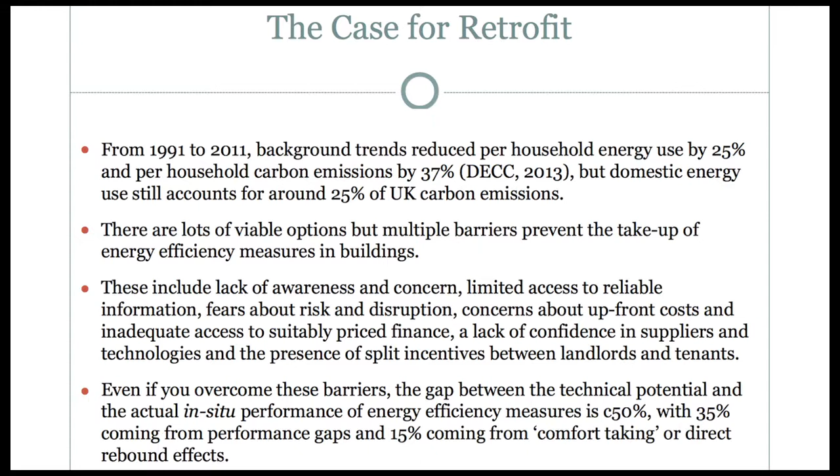When we look at what could be done, well, there's loads of stuff you could do, but multiple reasons why most people don't do it. I won't go through them all, but lack of awareness, lack of information, skepticism that it's really going to work, lack of access to money, lack of trust in suppliers—all these things conspire to mean most people don't exploit all of the available opportunity.

On top of that, what the research says—and this is based on real data—is that these measures lose about half of their potential gains because they're installed incorrectly or used incorrectly. So if you insulate a house, sometimes they don't put the insulation right up to the corner of the attic, and you lose energy that way, and so on.

Some of the potential gains are also lost because of comfort taking, or rebound effects, as we call them. Comfort taking is where you have a more energy efficient home and you consume more heating as a result. Instead of turning the thermostat down or keeping it the same, you take your jumper off and live in a warmer house.

If you're fuel poor, you're not adequately heating your house already, so that's a good thing—you are in less fuel poverty as a result. But there are big questions around whether people who are not fuel poor just consume more energy because it's cheaper per unit of heating, and I'll come back to that in a second.

There's a real question about whether this stuff actually works, and I'll give you an example now that will address that question. So Kirklees, Huddersfield—the Kirklees Warm Zone scheme is one of the biggest retrofit schemes completed in the UK to date. It cost £21 million.

Some of that was local authority finance, some was energy company money under something called the Energy Company Obligation—energy companies are obliged to spend money on addressing fuel poverty. It was initiated by the council. There's a political story behind it, but I won't go into that today. It was delivered by a company called Yorkshire Energy Services, a not-for-profit company that coordinated the scheme, but it was local builders and electricians and so on who actually did the work.

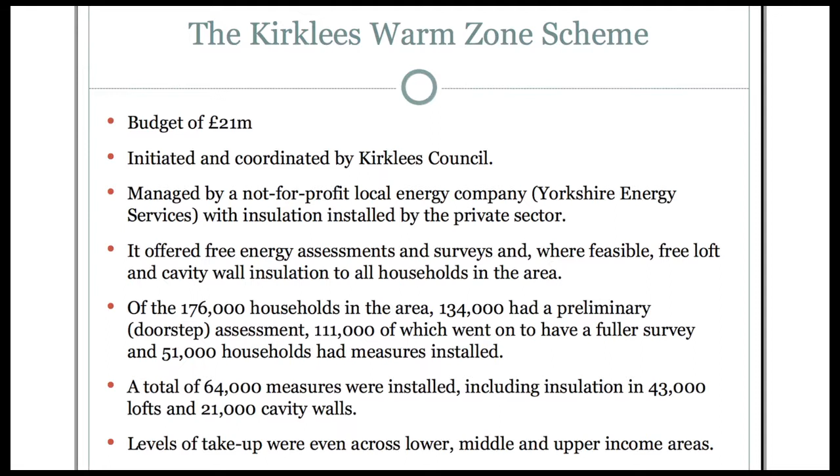So we have just completed an evaluation of the impacts of this scheme. And what we found was that the impacts were much greater than were predicted, and therefore the savings we predicted in the Sheffield City Region report are probably an underestimate if the same kind of outcomes could be achieved here.

Impacts were 20% lower in lower income areas. In other words, it was better at addressing fuel poverty, but it also led to financial savings for fuel poor households in lower income areas. So on an equality aspect, and also on a public health aspect, that is a very positive thing. I'll come back to public health in a second.

However, impacts were nearly double what was expected in middle income areas and more than double what was expected in higher income areas. The reason being that households in those areas were already adequately heated, and rather than turning the thermostat up and taking your jumper off because it was cheaper, the surveys back this up, those households kept the thermostat the same or even turned it down a little bit and banked all the savings as an energy and hence financial saving. So it was twice as effective as was predicted for middle and upper income areas.

And what that meant was that the average annual saving was around £125 a year, or around 10 or 11% of the household energy bill.

And when you aggregate that up for the whole scheme, the £21 million that was spent generates total savings of £6.2 million a year for the area and for the householders within it. The payback is therefore 3.5 years and it generated around 240 jobs. So all of that is higher than we predicted. It's a better outcome than the Mini-Stern suggested was realisable here.

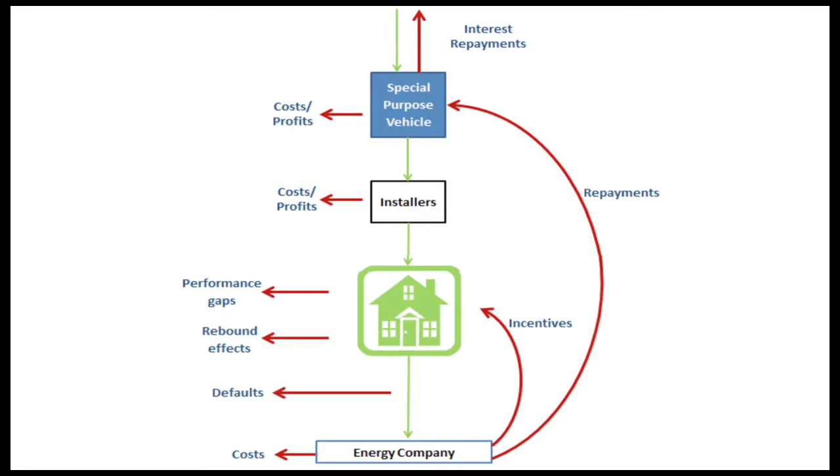And then the remainder goes back into the community interest company and is recycled and reinvested. The analysis shows even with really leaky systems, with loads of money leaking out, this would reduce the £800 million figure to £600 million. So you'd save £200 million by reinvesting the benefits. And then the whole thing becomes self-financing.

Anyone who's bought a community bond - the company would buy it back over time after paying 5% interest for as long as you own the bond. All investors would be paid, and the impact would be that all houses in the city region were retrofitted within 17 years, with the whole thing utterly self-financing over a 30-year period.

So some of this is optimistic, right? It requires some institutional investment and innovation to happen, but that's pretty much what Birmingham has done. It's pretty much what Leeds is doing. It's pretty much what Newcastle is doing. Reading, Brighton, Bristol, multiple other cities are doing something similar.

And there's a lot of grant income around to set up feasibility studies and run demonstration schemes, with funding into the tens of millions to enable Sheffield to set something like this up, adapt it a little and get it working. What it needs is a little time, a little leadership, and a little support. It can grow small, prove its feasibility, and then as it's proved to work, it can take off quite quickly.

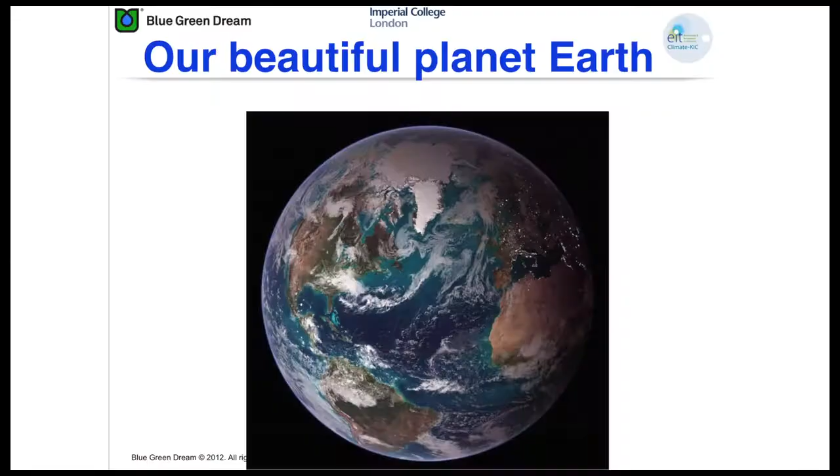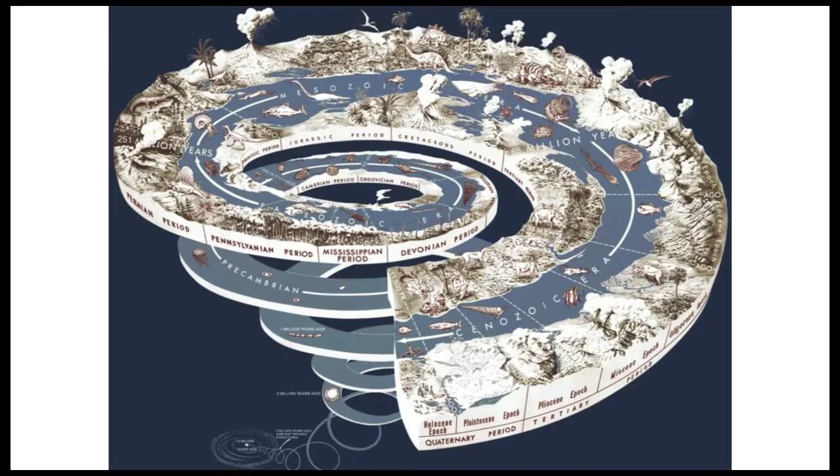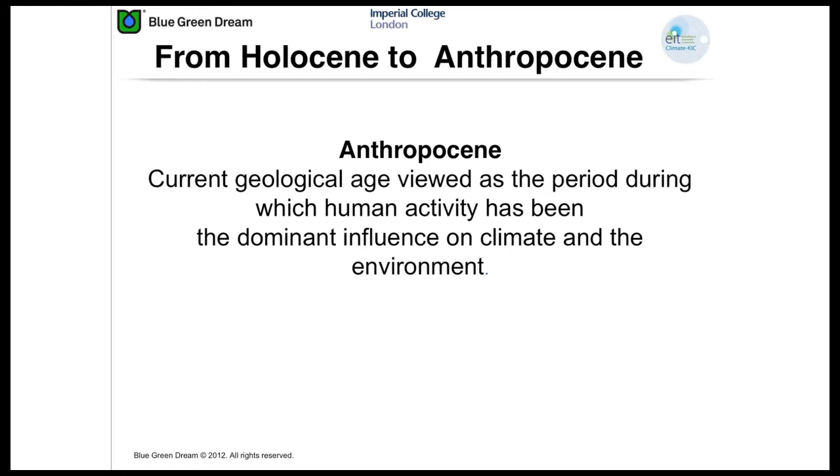See how beautiful it is. Unfortunately, it is under big problem. It took millions and billions of years to create this planet. The last 12,000 years, called the Holocene, when people started farming, domesticated animals and so on, is a geological period. In the last 200 years, it took us only 200 years to start having an enormously negative impact on climate and environment. People even call this new geological period the Anthropocene. The Anthropocene is so small you don't even see it, it's a very small slice. And we have been very efficient in ruining this beautiful planet. So we have to do something to reverse this trend.

I was in China last week, and they're taking it seriously. They are big polluters, but they're taking it seriously. So what can we do here? Can we make this planet, can we first of all save it?

We are facing a big problem and we have to do something quickly. What's been presented is a brilliant example of how you can do things at a small scale in one sector, and if everyone else does the same in all countries, in all sectors, we can save it. So we think we have a solution called Blue Green.

So why do we do that? Well, temperature is predicted to rise about 2 degrees by the end of the century on average globally. Anything beyond that, 3-4 degrees, creates an irreversible process. We cannot fix the problem. The planet is in big trouble.

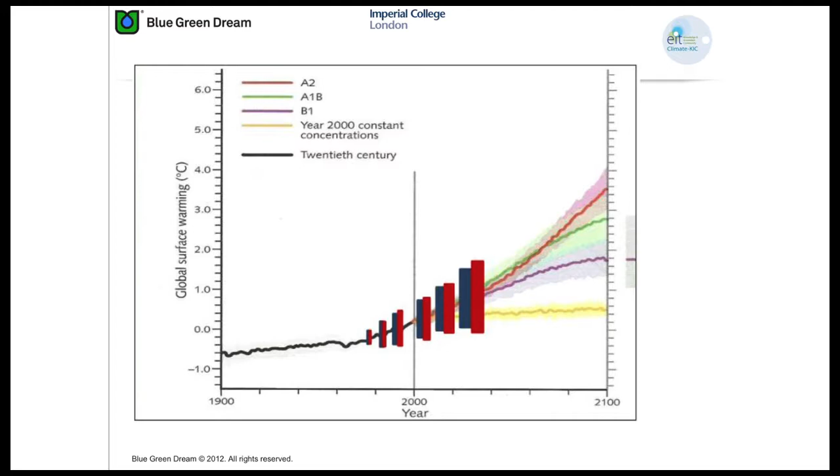We already have enormous problems with extreme weather. We may have the same average temperature, but it's concentrated into shorter periods with higher temperatures and lower temperatures. Paris was unlucky in 2003, when in 3 days the temperature rose dramatically. 47,000 people died. You'll look at the internet and they say 14,000, but that's only central Paris. Looking at the larger area, my colleagues from Paris University say 47,000 died in 3 days. If you speak to French people, they say, oh, we know, climate change, it's a heat island. Well, it's not a heat island, there are many other problems.

So we are here. We've seen New York facing heat waves and cold waves and so on. So we are somewhere here. At the moment, planet Earth is consuming 50% more resources than is sustainable. With all the trend growth, business as usual, as Andy said, China and India, if they continue growing as they are and don't change anything, and if sub-Saharan Africa's population increases by 2 billion, which is predicted, by 2050 we are going to consume 2 times more than the planet can afford. So we cannot do that.

We have to do something now, and our design is very similar to Andy's. We have to start changing our behavior in energy, but also in many other sectors, so that by 2050 we reach a balance between natural resources, affordability, and so on.

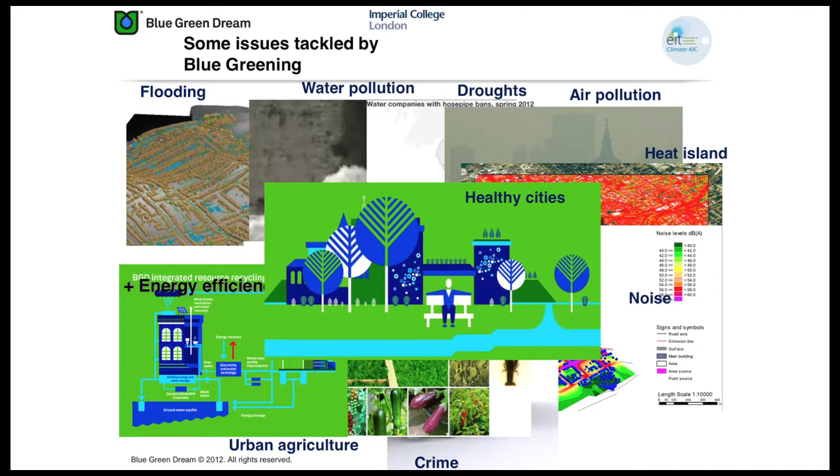In the end, we hope that our cities, by 30, 40 years, will look much better. Sheffield will probably look not only greener, but will have many other environmental benefits. London, at the moment, is losing every 10 years 2.5 Hyde Park equivalent of green space, and that is official data from the London Eco Centre. I don't know what the situation in Sheffield is, probably not that drastic, but it is happening all over.

If you applied the same criteria of stratigraphy and other changes of Earth processes, would you say we're in a new era? And the answer is yes. That's not a happy moment, by the way. This is not 'yay, humanity.' This is 'oh my God, what are we doing?'

Jeffrey Sachs had a presentation, 1 hour, in LSE. I suggest you download it, it's on the internet, and listen to him. It's a serious warning, and I've just taken 1 minute. It's not 'oh my God, what are we doing?' We have to do something serious.

Jeffrey is an author, one of the key authors of the Sustainable Development Goals, the key document of the United Nations, which has 17 points. I have just listed a few of them, most of them dealing with water. I'm a water engineer, a civil engineer, but I've now learned a lesson that we have to do much more beyond our own narrow areas of expertise.

Well, the clock is ticking, bells are ringing. We have to do something serious, we have to do it now. Well, the future is not what it used to be. How are the other people doing?

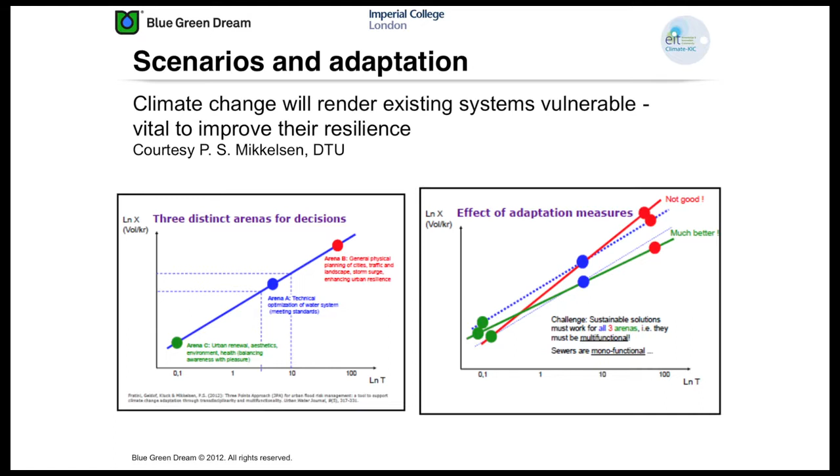Nobody has the money to invest in what we call a rich man's solution - let's build bigger dams, bigger dikes. Dutch people are now increasing their dikes from a 1,000-year to a 10,000-year time period. Well, it's very expensive, and the solution is only this limited amount of money.

When we invest in something, we try to look at the multi-benefits. We try to see if we are investing in water or energy, can we, with the same pot of money, get some other benefits? The answer is yes, and this is the only solution: multifunctionality, multidisciplinarity. I'm going to show you how we do that.

We cannot go for the poor man's solution, where poor men invest in something and it then fails. We have to look at the wise man's solution. We thought that we had a city with water, sewer, and drainage, and we were well off. No, unfortunately, we have all these functions, and they dysfunction. So the Australians have come up with water-sensitive city design, and we are embracing it.

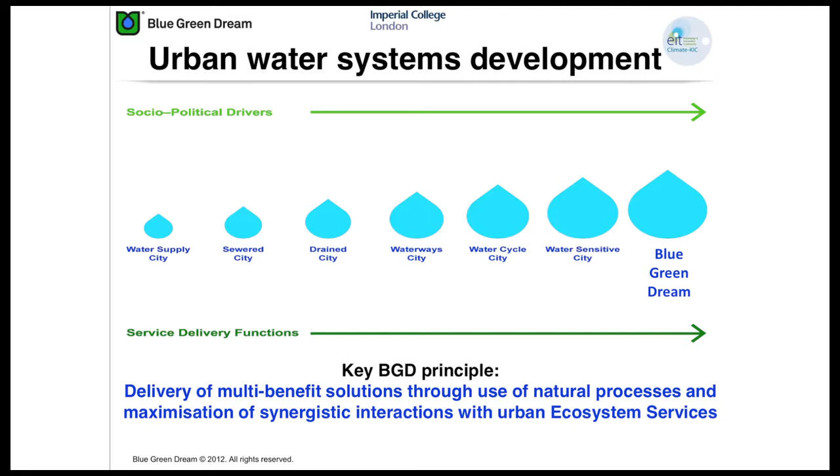And Blue Green is not only about water; it's about energy, biodiversity, and other sectors. So we start with water as a blue element: urban water, water supply, drainage, treatment of wastewater, and interactions with green spaces. In the past, we had architects, landscape architects, energy people, transportation people, all working in silos, not even talking to each other often, even within the same consulting company.

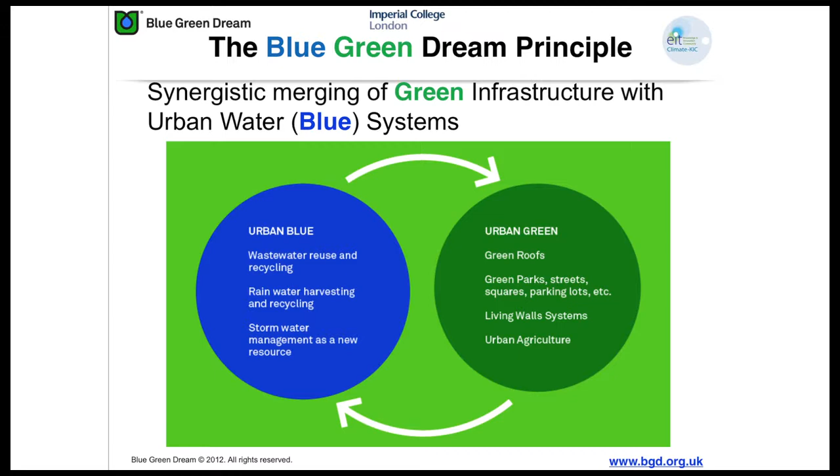Unfortunately, this doesn't work anymore. We have to learn how to talk to each other before starting a big project, whether retrofitting, reconstruction, or new design. We have to bring on board all other experts: energy, biodiversity, carbon capturing, transportation, air pollution, noise. This project is about creating tools and methodology and demonstrating that this method works, and it's the only sensible and financially affordable way our cities can go through all these retrofittings or new developments.

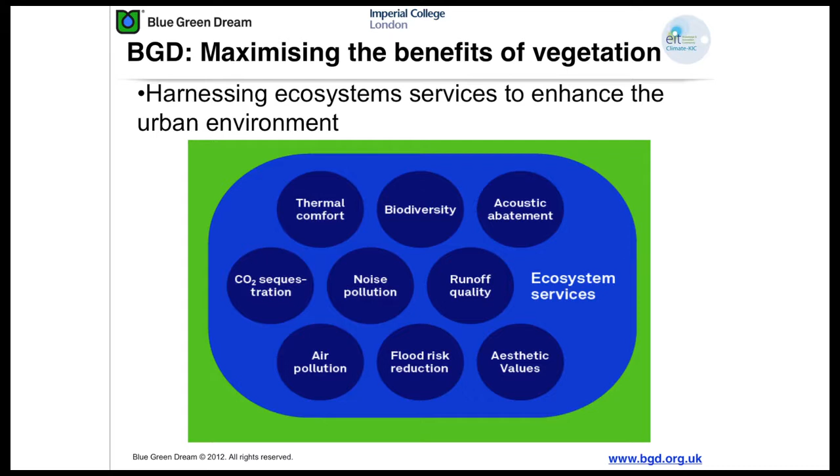There are quite a few projects in London worth a few billion. Elephant and Castle, 5 or 6 billion. Earl's Court, Old Oak, and so on—they are all multi-billion developments. If they are done differently than in the past, it's a huge saving. If done business as usual, they just create new energy demand.

So these are the 4 countries we have in this project: France, Germany, Netherlands, and the UK. I'm coordinating this project, and we have achieved quite a lot so far. We are now creating European regional centers for implementation of this philosophy in cities, in consulting companies, and at the individual household development level, and we are spreading this philosophy all over the world.

I was in China last week, and they are taking it very seriously. They want to create a Blue-Green Center China, with a blue-green center in each of the 40 provinces. In 2 weeks, I'm going to Vancouver, Canada, considered the greenest city in Canada, and I believe they can do much more with this more integrated, robust philosophy.

Well, where is the trick? It's nothing revolutionary, not rocket science. We have our house, and Andy has presented nicely how we can do a lot of things simply in the energy sector. We can do a lot in water, food, and other ways. We take a lot of potable water and use 40% of it just flushing the toilet.

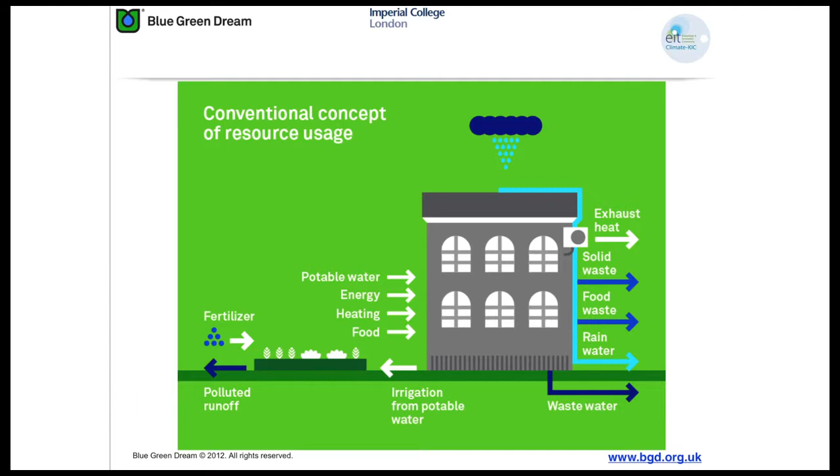We can capture solar energy with photovoltaics and store this energy—the next speaker will talk about storage—capturing it in summer and storing it in rock, as we've seen in a project, then recovering this energy back for heating. That means heating and cooling can be provided at 20% of the cost we now pay for electricity, using alternative, locally available sources.

Recycled grey water, recycled rainwater, and food produced in the house make our houses completely different. As Andy predicted, in 15 or 20 years, every house will do something with insulation. Other measures, including water, waste, and all the things that are part of sustainability, will also have to follow, using a similar model.

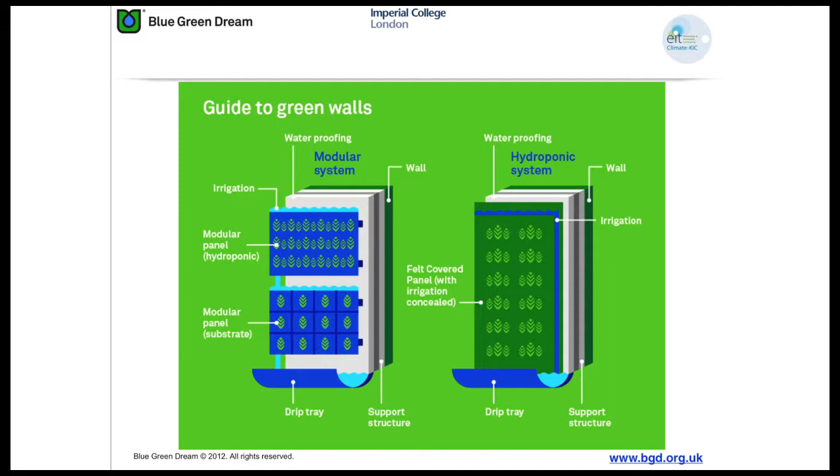Green facades—in the past people used them just to look nice. Now they can be used for treating water, biodiversity, thermal insulation, food production, and more. Multifunctionality is the key issue. We collect rainwater and wastewater and mix it, which makes it much more difficult to treat.

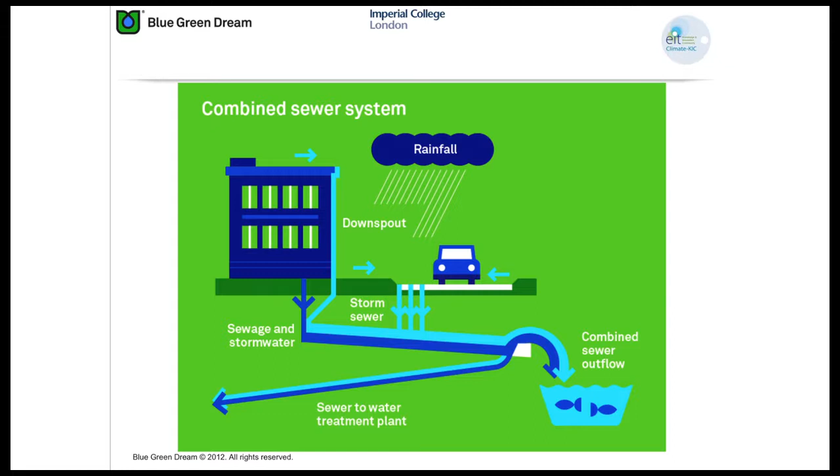If you keep them separate where it should not be separated, we are creating new resources. Wastewater is a resource. California faces a huge water shortage problem. My colleagues from Stanford University got a 100 million grant to come up with a new strategy. There's no other solution. Simple.

A city is a catchment area. Every drop of water is a resource. Capture it, recycle it, wastewater - that is the only answer for this huge problem in California. And if you do that with energy - Andy has presented a lot, but I'm expanding this bit - we can capture and store it underground.

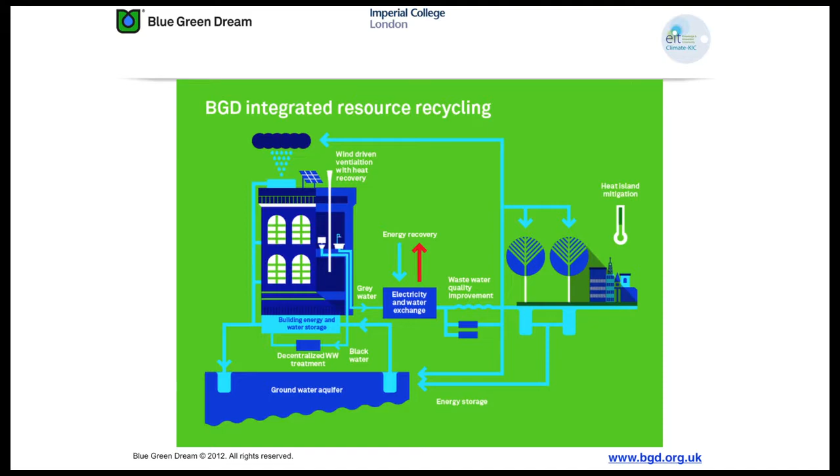We can recover energy from the sewers. In Berlin, we are now using sewer water to heat the whole library, and then dump the hot air in summer again into the sewer. So the humble sewer is just a heat source and a sink for waste. If you do that for heating, cooling and flooding, every little bit of urban activity has huge potential by implementing this.

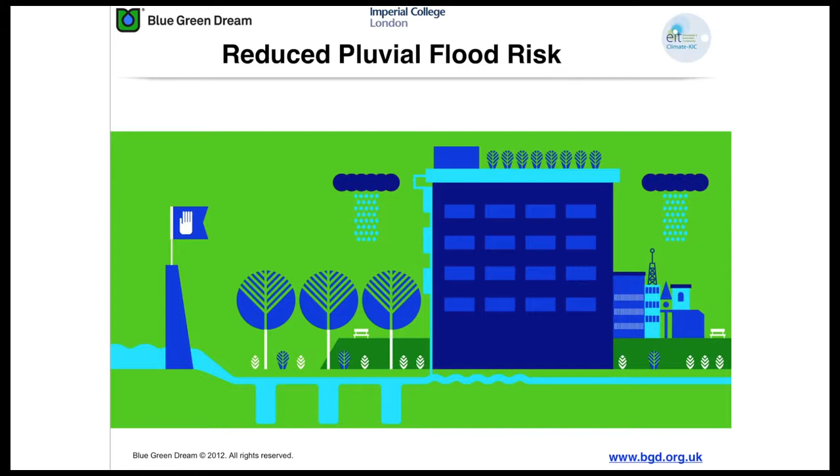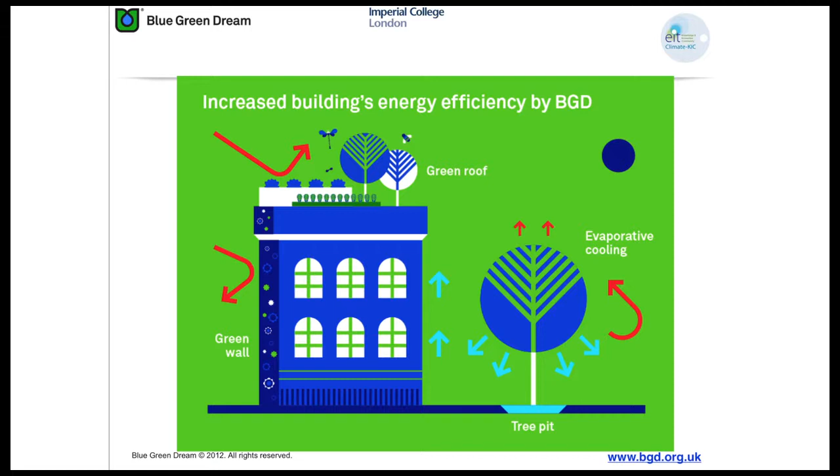Now, the humble tree - how many trees is Sheffield planning to plant? You hear these figures of millions and so on. Well, every tree which is planted should be done differently. If a tree is planted in a small pit, a small reservoir, it captures rainwater, reduces flood, reduces pollution, and it has this water for evaporative cooling when in summer hot air goes up.

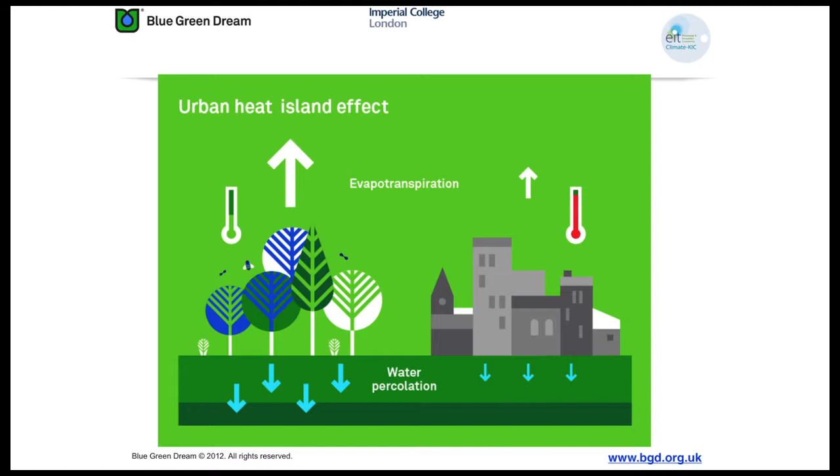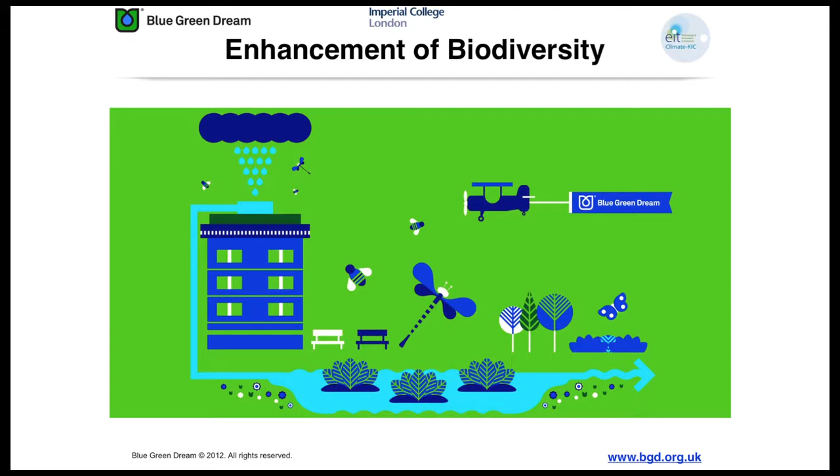Cold air is a new resource. We can use it in design and manage and design new cooling systems with this humble tree. But it has to be done differently, and that is already taking place - evaporative cooling, greening, biodiversity. Again, we need water. Trees are dying in cities. We need bees and insects for pollination, and they need water for support. And this water is not an unlimited resource - we have to recycle what we have.

Food production is already mentioned. We're working with the university in Zurich. They already have experimental fish farms on the rooftops of their houses, which farm fish, and it costs 20% of what you would pay for the fish in the supermarket, and you have it alive in your house. So it is not nothing - it is already a commercial product. They sell these fish farms on the roof, and people from Saudi Arabia already buy them massively.

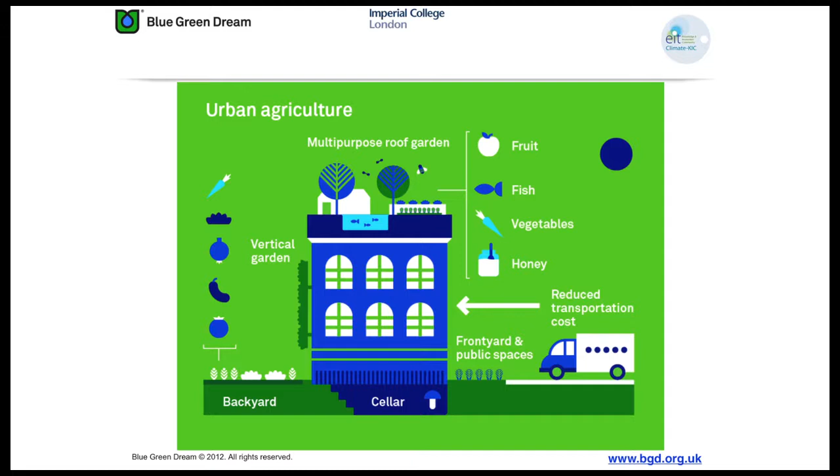Food production on the facade, on the roof, in the cellar and so on is again something. If you go to Detroit - it has collapsed economically because of the car industry. People were poor, so they started city farming. Detroit is now a big city farm. It is possible. It is not nothing.

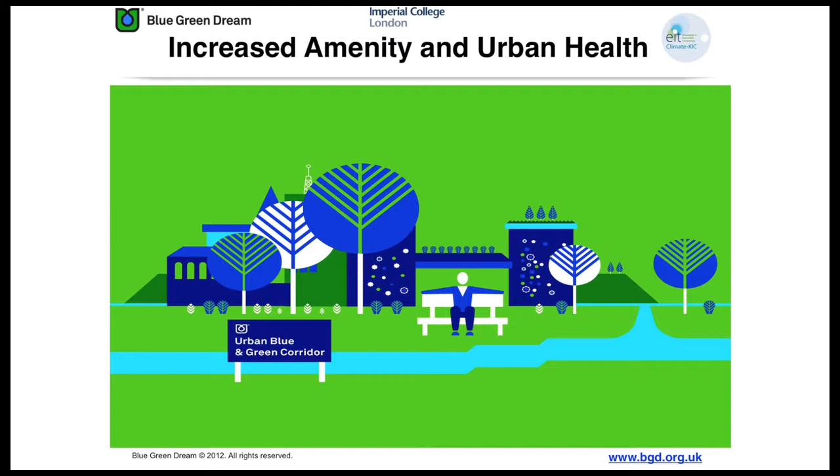And then in the end, we hope we will have our city. So I presented the philosophy of how all these bits or pieces, which are simple - water, energy, air pollution, noise, biodiversity - each of them has an element to improve sustainability. I'll give you a few examples.

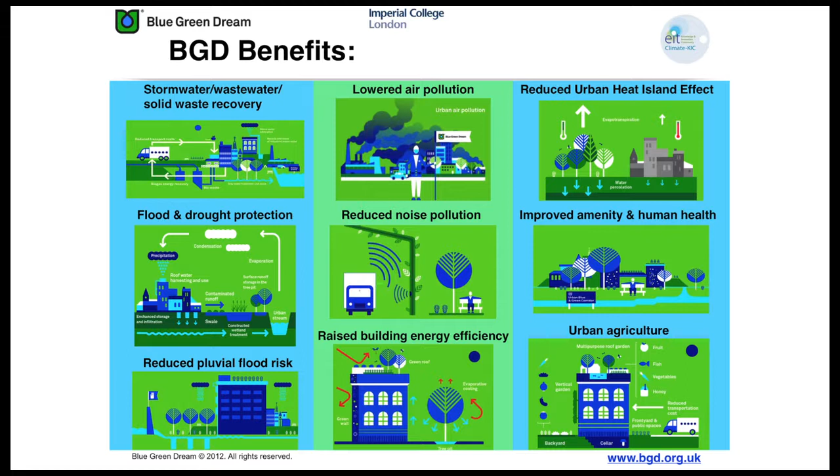All these topics need some research, some innovative models, some design tools, guidelines and so on. We have about 17 doctoral students in our 4 universities in France, Germany, UK and Netherlands, and we are developing new tools, but we are not waiting for these PhD students to create their Bill Gates companies and start making big money out of this.

We do it today. We can offer the city council in Sheffield an integrated city development based on the Blue Green Dream philosophy, bringing all these icons together, but paying very big importance to the group of people like your commission. I'm very much positively impressed by what you have in mind, and I would strongly support you, and I would very much be happy to come and do something with you. But this is the way to go - these things don't happen by themselves.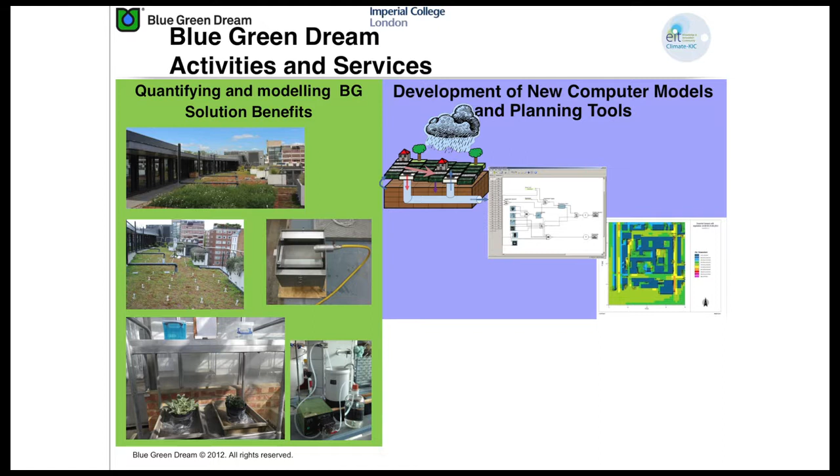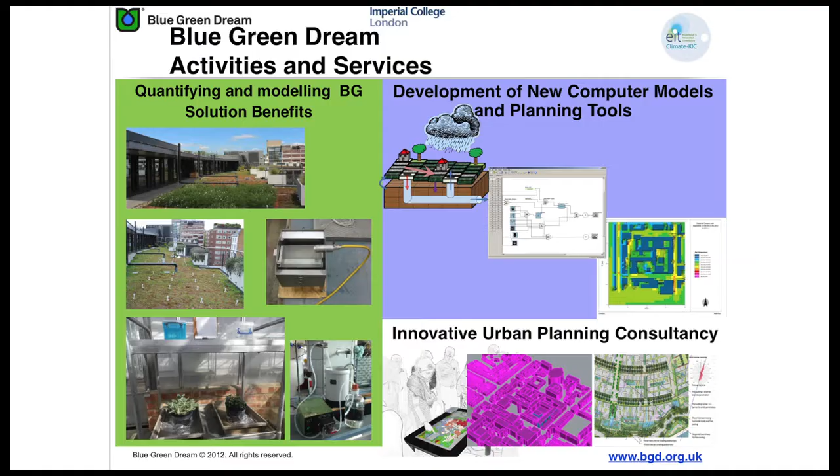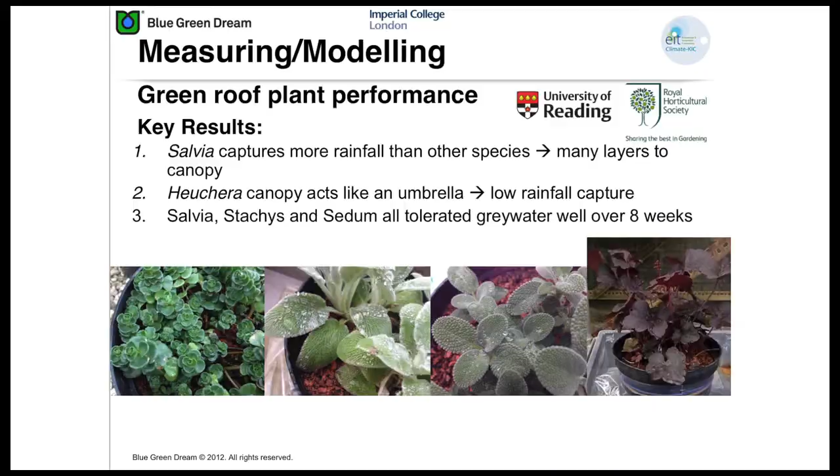There are a few examples already of how we work with green roofs and facades, experimenting with different types of plants and different methods of analysis and planning tools. So the key here is planning new development and retrofitting - from a single bedroom house, to a group of houses, district, development, city, whole country, planet. We need different types of plants - some are better for absorbing heat, some are better for reducing noise, and so on.

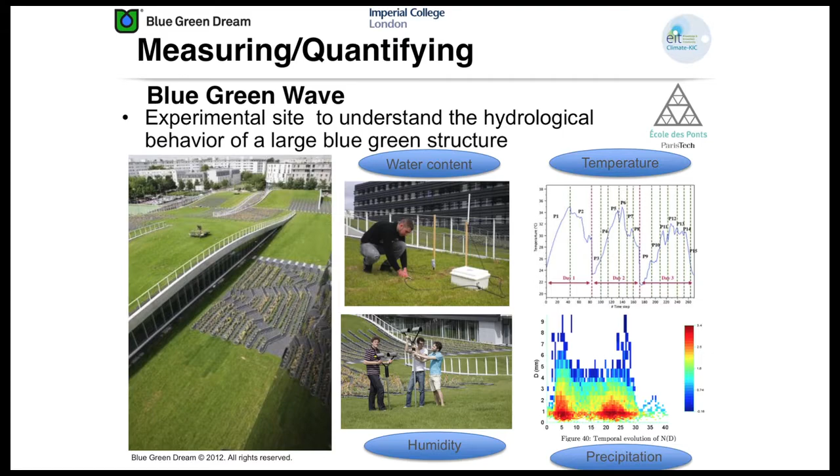And I'm going to skip some of the slides. This is the biggest blue-green experimental facility at the University of Paris, and we are working together with them developing new methodologies for predicting floods, for reducing heat island impacts, for improving irrigation with recycled water, and so on.

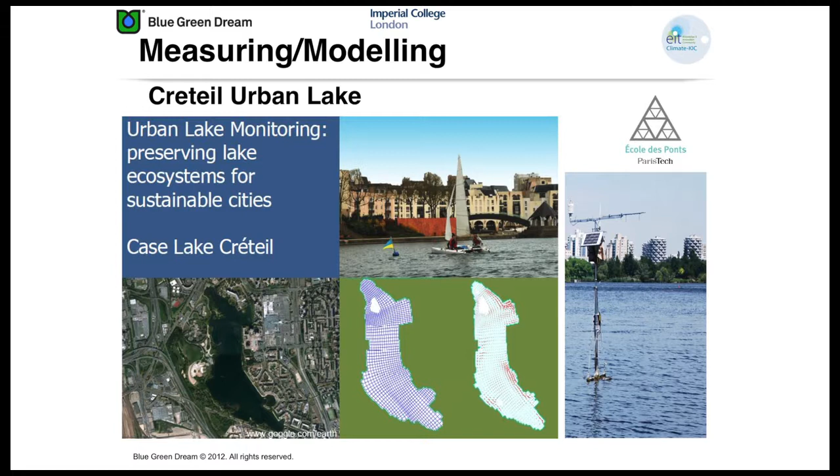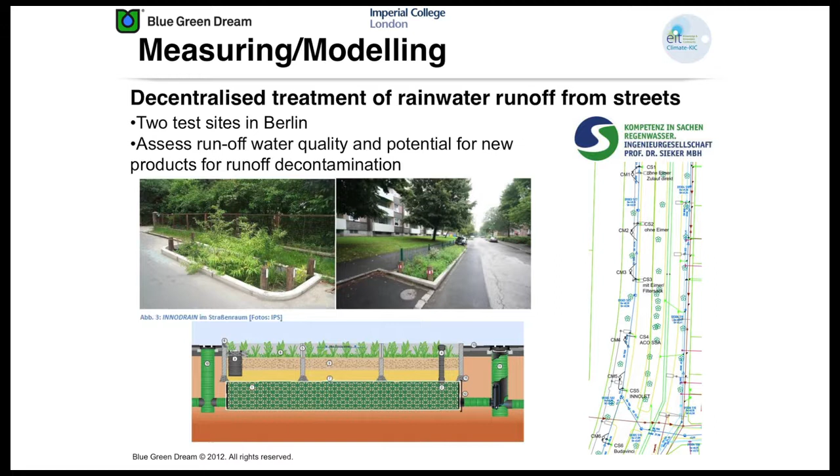We also have to tackle problems of urban lakes and energy. Every water body can be used for extracting and storing energy, and you can replace some energy use by using these natural systems. This humble green area in the street isn't just green space—it's a factory, a filter which improves water quality, reduces flooding, and reduces the heat island effect.

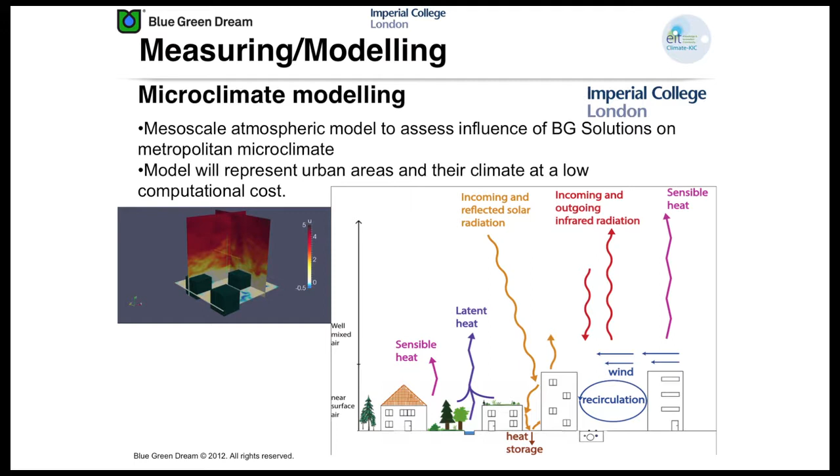Integrating the whole city, we can have much lower impact from the urban heat island. We're developing models of how green spaces reduce the negative impact of urban heat islands, and coming up with innovative solutions for planning, retrofitting, and designing new cities.

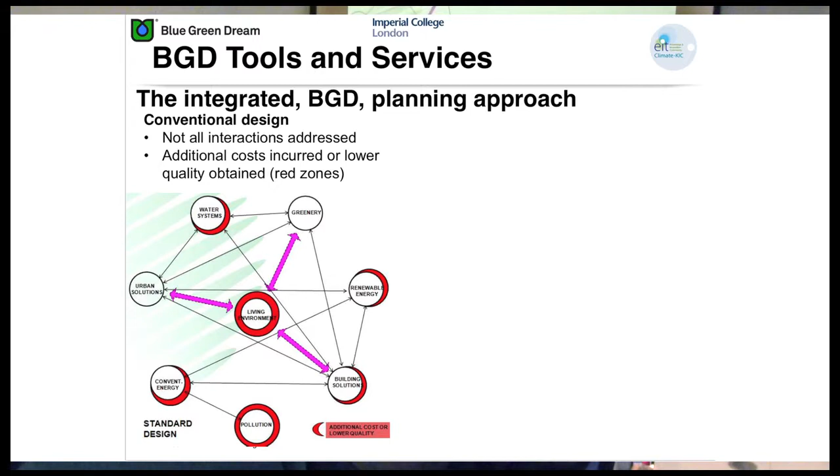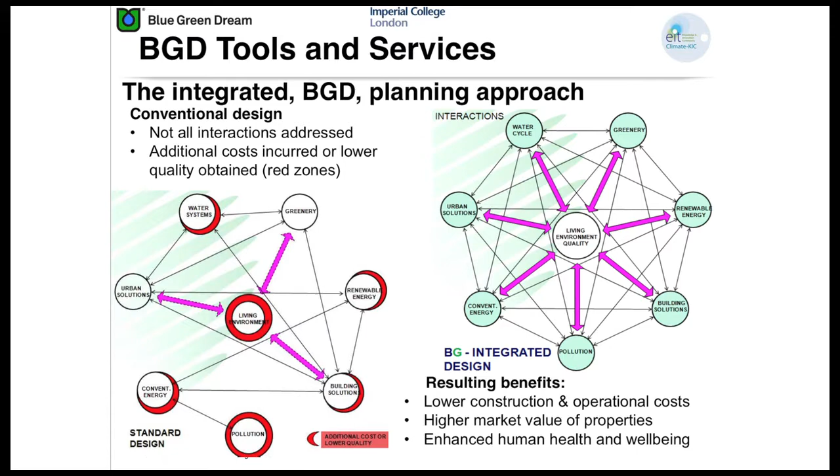This is a key diagram showing how designers and planners work at the moment: energy people, water people, biodiversity people—everybody runs their own show. They're not talking to each other, even within the same company. We have to come to a different way of communicating among specialists, and this is how we do it—bringing together architects, landscape architects, energy people, transportation, economists, lawyers, all together.

We agree on the multifunctional, multidisciplinary concept, and then we implement it. Our solutions have to deliver much lower energy consumption, much lower bills for water, energy, heating and cooling, a much healthier environment, much lower NHS bills, and a more pleasant environment with better property values.

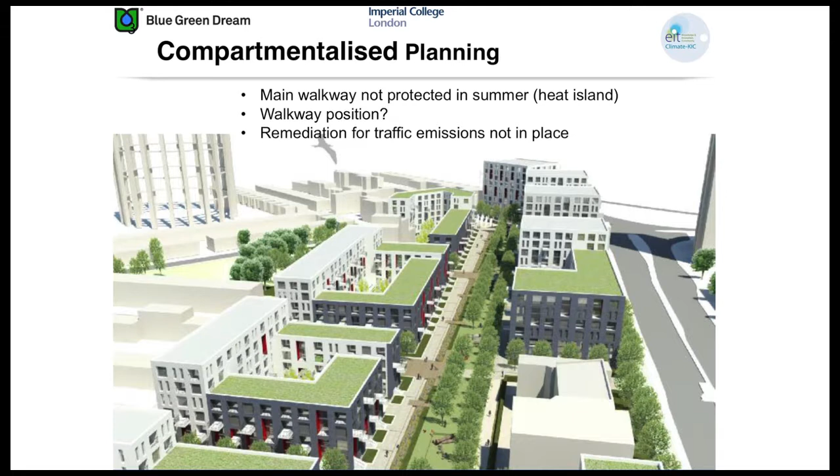This is an example of how things should not be done. This is a new area in London, designed, and after just two days of looking we found that 40% of energy could be saved if it had been designed differently, with no extra investment. These facades face south, warm in summer, and trees are on the other side of the street. If they'd been planted here, these trees would create a natural walkway, and so on—instead the water is just collected and thrown away to meet flood criteria.

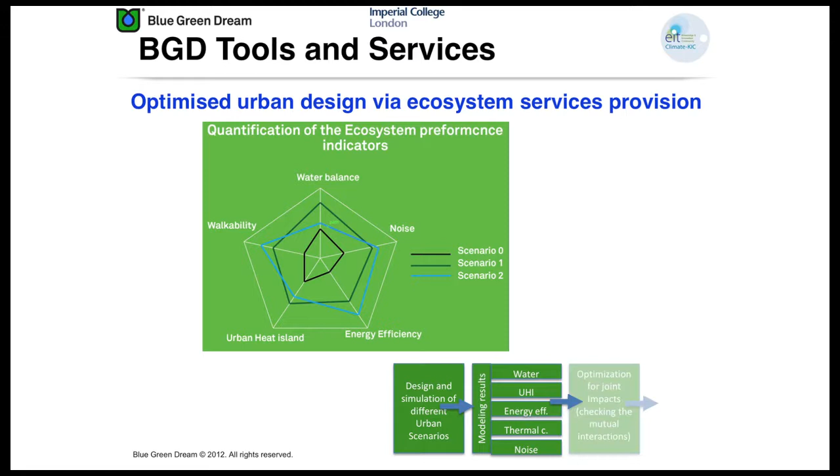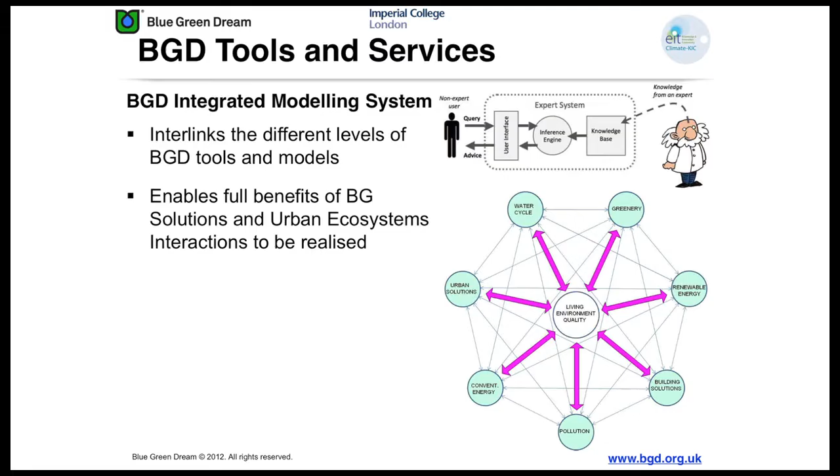The key issue is optimizing these functions in a city and coming up with new solutions. I'm going to skip some slides because there's a lot of technology here, and I'm over time. Essentially, the key when dealing with new developments is multifunctionality. I'll give you an example.

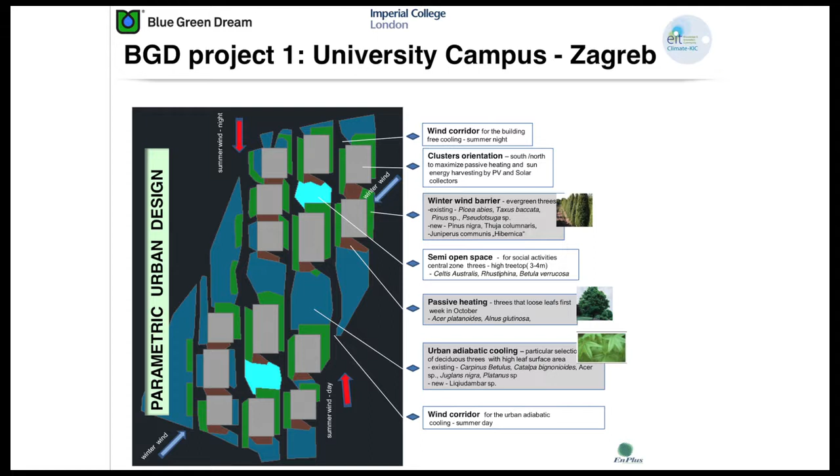A new university campus we designed in Croatia uses vegetation only and energy storage from the roof—64% less energy consumed for heating and cooling using natural processes.

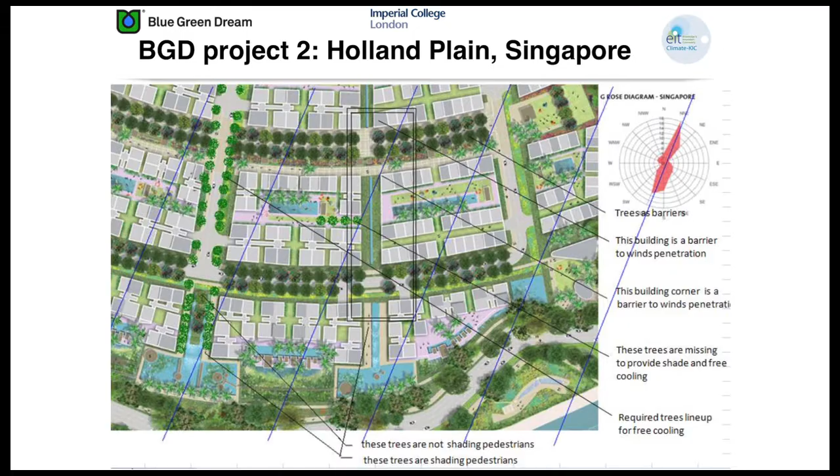And the first blue-green city we designed is being built in Singapore. This system has no storm drainage—all the rainwater is captured, recycled, and used for recreation and other purposes. I'm going to stop here.

I would like the university campus at Imperial to become a blue-green hub. It's a big bureaucracy—it took us two years to build just one green roof. Sheffield University has a green roof center, which is excellent. Thank you very much for your kind attention.

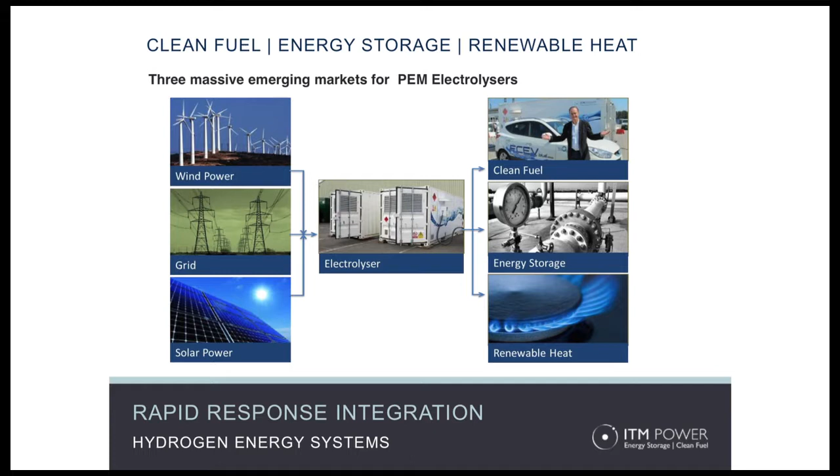That's becoming a big issue. It's called curtailment, and wind curtailment is costing the electricity consumer a lot of money, because we pay for that wind to turn off at night. It's not exactly a great selling point for renewables, and it's doing a lot of damage.

So our concept is, instead of turning off that wind, you turn on an electrolyzer and harness that surplus electricity and make fuel.

The problems with renewable energy deployment are experienced when you exceed that 20% capacity, or 8% by energy, in a country. Germany, Denmark and Spain have experienced that and are suffering real problems in what to do with all this surplus energy. There's only so much you can export, and it's often exported at negative cost.

So the economics of being able to store your electricity and make a fuel are improving.

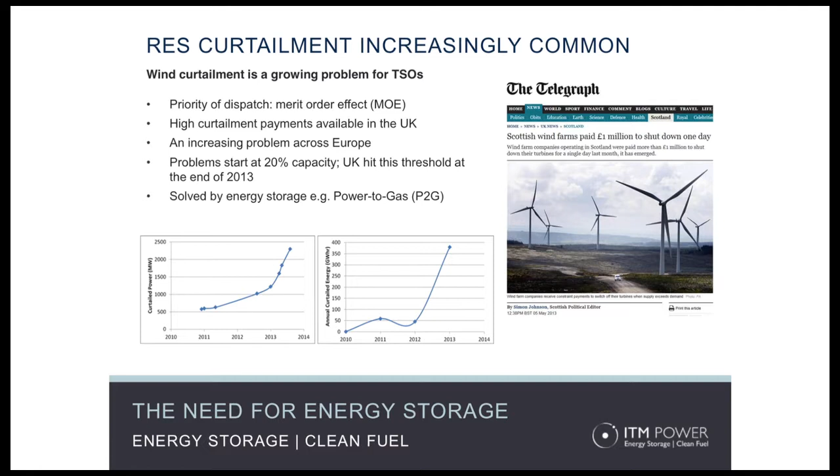Because the issue, and the reason why we turn off the wind, is because it's difficult to turn off your traditional power plants due to the time it takes to regenerate that electricity. And you don't know how long the wind's going to blow for because it's unscheduled. So at the risk of turning something off, you could lose power and have a blackout. So the costs for balancing services are forecast to be enormous moving forwards.

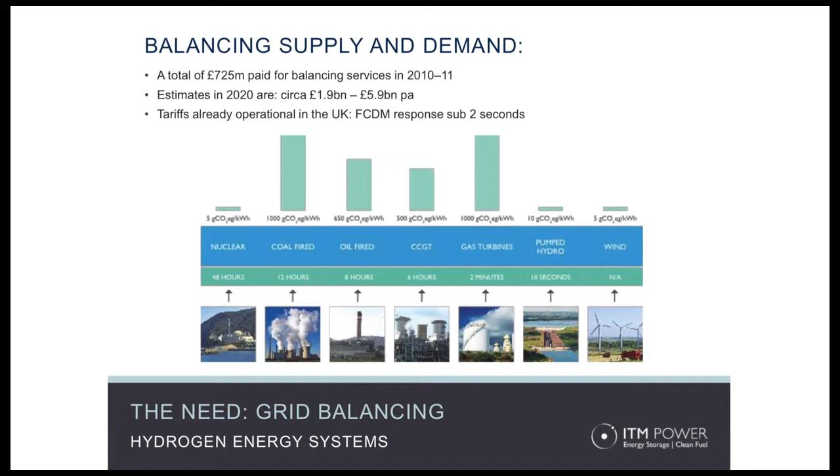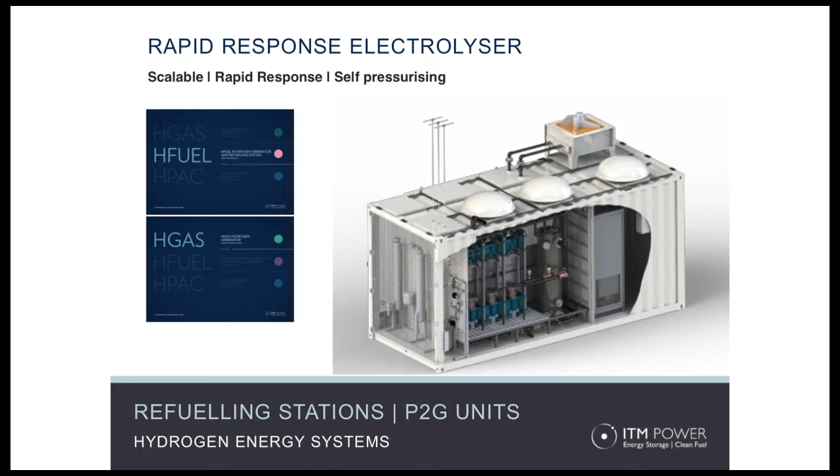And this is the system we turn on. It's a containerized solution, and it can be used either for fuel for cars or for long-term energy storage, where we're converting electrical energy into chemical energy and injecting it into the gas grid. It's called power to gas.

Power to gas offers a big opportunity to connect the electricity grid with the gas grid, with the electrolyzer acting as a direct transducer. So it's enabling you to inject hydrogen, the energy vector, and mix it with natural gas and distribute it in the gas grid - because the gas grid is four times the size of the electricity grid in terms of energy. You could also mix the hydrogen with waste carbon dioxide and make methane, synthetic methane.

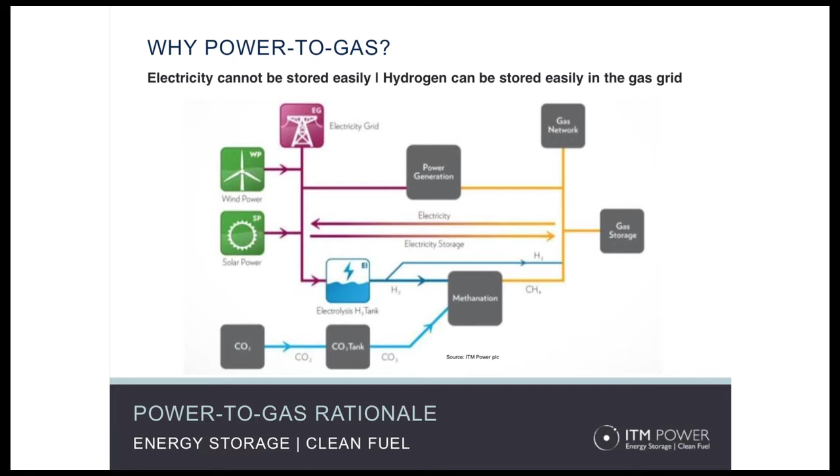The technology's there. There are a lot of energy storage technologies, and they differ between storage capacity and discharge time. On the left you have small amounts of energy, small amounts of time - batteries are ideal for starting a car. But with batteries you don't separate power and energy, so the physical size of your battery is linked to the time at which you can store that energy for, or use it for. With pumped storage, compressed air, and hydrogen, you're separating power from energy, which gives you a lot more flexibility.

But the issue with both compressed air storage and pumped storage is you've got to wait for that store to discharge before you recharge it. And if you're actually trying to harness renewable energy whenever it's generated, when it's surplus to demand, you can't afford to always discharge before you recharge. It's not practical, it's not possible.

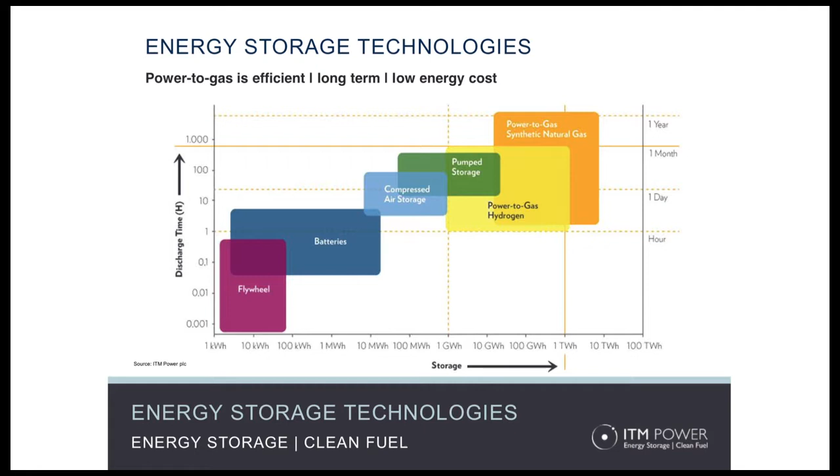So power to gas and hydrogen is the technology we have, and the electrolyzer is just the converter. We're using storage infrastructure that we already own, we've already invested in, and we don't have to wait for it to discharge before we recharge it.

So it's all very well talking about theoretically wonderful ideas, but where's it demonstrated? Well, our plant is the first system anywhere in the world to be demonstrated injecting hydrogen into the gas distribution network. This was a sale to the Thüga Group, a group of about 100 German utility companies, an enormous conglomeration, vertically integrated, dealing with gas, electricity, transport, and telecoms. The Thüga Group bought our system to undertake a pilot project to demonstrate the concepts, test the technology, its robustness, its efficiency, and the practicalities of harnessing and converting wind electricity into hydrogen and injecting it into the gas grid. So there in front of you is the system.

The container, you just plug it into a water supply and electricity supply, put on hard standing. And next to it is a gas mixing plant. So the hydrogen that's made by the electrolyzer then goes into another box and is mixed with natural gas and injected into the gas grid.

From a perspective of the first of its type, Thüga have invested in a visitor centre which attracts politicians and utility companies globally. It's a real lighthouse project, going on for the last 18 months now, and Thüga are getting more and more excited by it. They've started to issue press releases on its performance and its technical capability to enter the secondary power market, which means it can balance the grid. And that increases the economic viability because there's another cash flow.

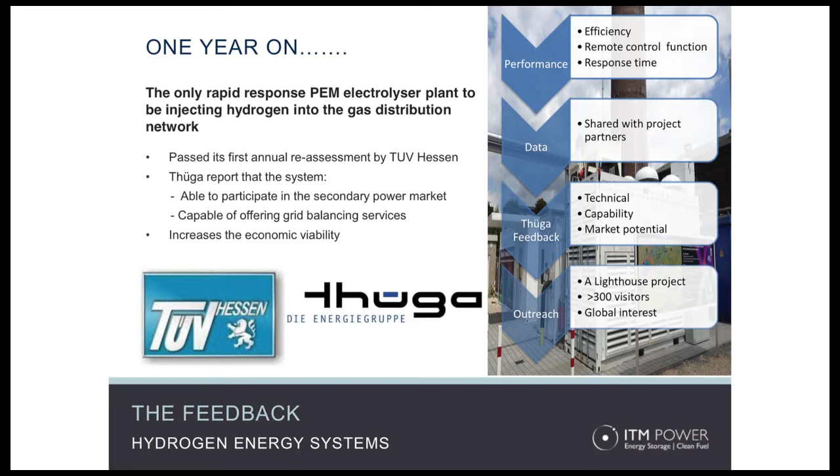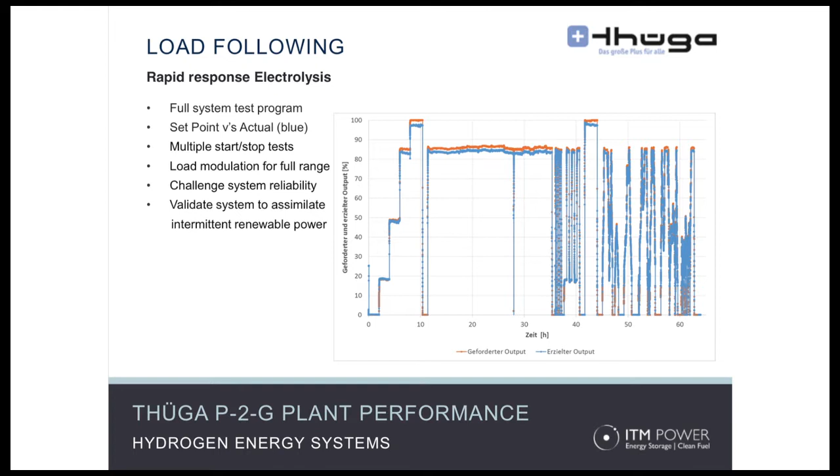This is an idea of some of the electrical input. The orange line is the input from a power station that's essentially been trying to push it to its limit in terms of the poor types of energy it can throw at the system. The blue line represents the response. On the right you have a wind profile, a typical wind turbine, and it shows how the electrolyzer modulates up and down. You can actually modulate in 0.2 seconds, so it's a very, very rapid response. It's about harnessing energy as much as the efficiency of the conversion.

With respect to system efficiency, Thüga have also announced the system efficiencies, which are in the high 70s. So it's a very efficient way of actually making fuel.

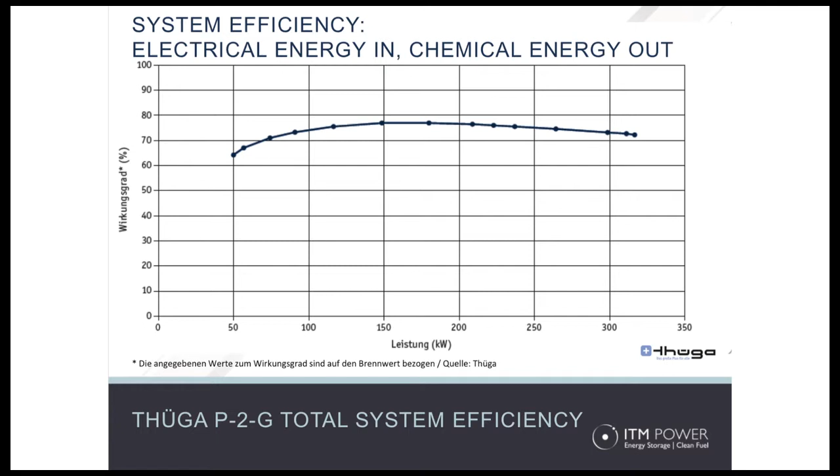And on the back of that, there's another sale, this time to RWE and Westnetz, installed at Ibbenbüren in Germany. So the learning you achieve through the first deployment, you then produce a second generation, which has greater throughput of hydrogen and performance.

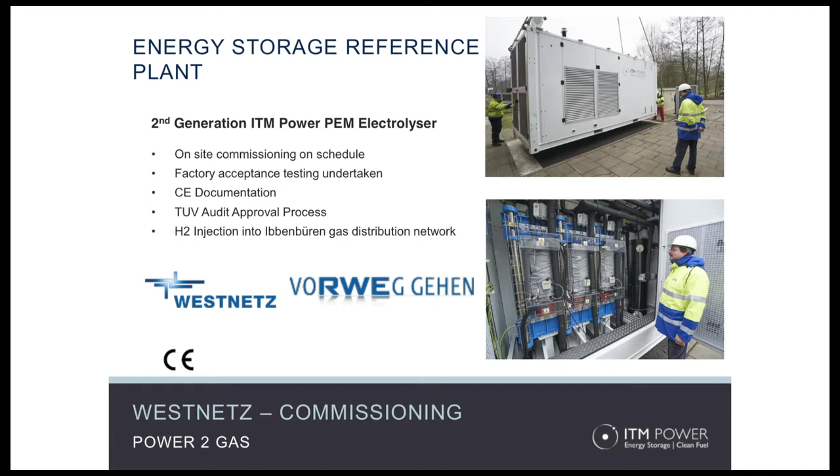In the UK, we've been on a number of studies which we've led, financed by the Technology Strategy Board, one of which was called Grid Gas, where we partnered with Shell, SSE, and National Grid, evaluating the concept of power to gas in the UK and where the optimal areas would be. We're also working with National Grid and AMEC in terms of different sites for power to gas.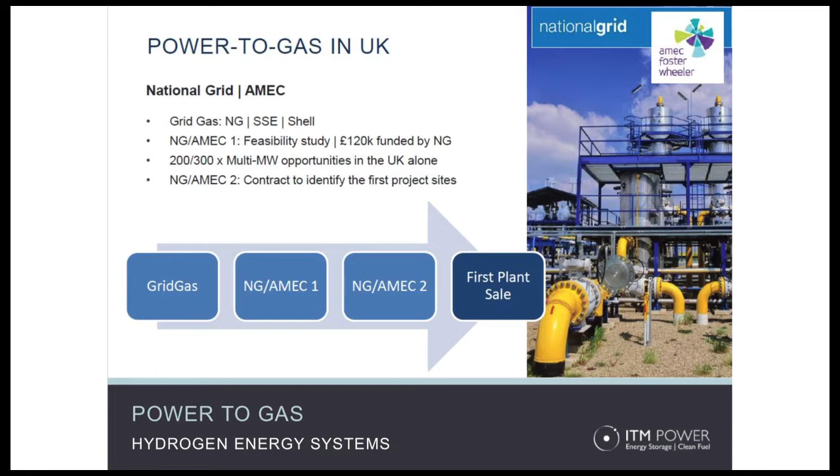So, clean fuel, moving on. Cars. What is a fuel cell car? Essentially it's an electric vehicle, but it's been enabled to have range and faster refueling. So it's got exactly the same powertrain as a plug-in vehicle, but instead of plugging into electricity that's spontaneously produced, you refuel it with stored energy that was made at a time when it suited the grid, when electricity was in surplus, when it was at lowest cost and when it's greenest.

So you can fill up this car in 3 minutes, you have 400-mile range, and it allows you to go about your usual routine, your business and social routines without disruption. And that's key to the rate of adoption of low emission transport. And the emissions are totally clean, you just get water vapour.

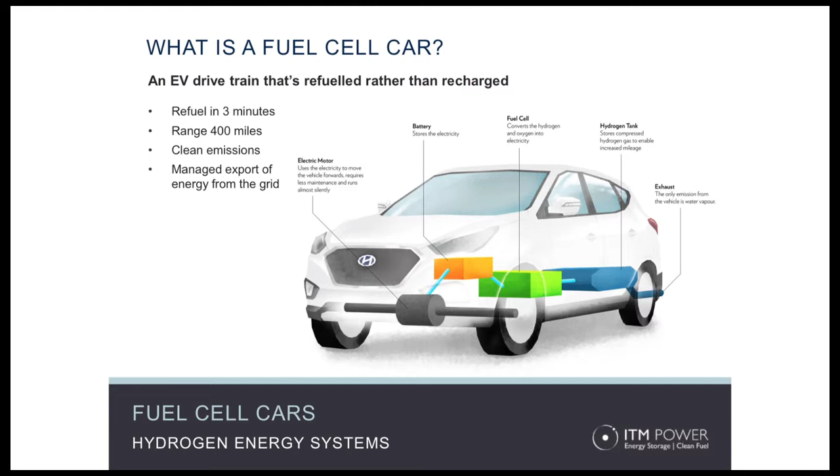In terms of the number of companies involved and the cars that are available, the leaders have been Hyundai, who launched a car last year. Toyota followed - and these are commercial production cars, I should add, not prototypes. These are cars that you can lease and buy.

The Hyundai cars - we've got one in Sheffield that we refuel nearby - and that car has all the power whenever you need it. It's so quiet you can actually have a meeting in the car. It's actually quite extraordinary, especially for my hearing.

All the car companies - you've got Hyundai, who are going to loan. Nissan have teamed up with Daimler and Ford to share technology. Toyota are sharing their fuel cell technology with BMW, and Honda and GM are likewise. Honda are releasing their cars to sell next year. So these are serious vehicles that are arriving.

In terms of why this hasn't happened already, well, we needed the cars, but we also need the infrastructure. We've been part of UK H2 Mobility, which is a government-industry consortium set up to evaluate the rollout of cars and refuelling infrastructure in the UK.

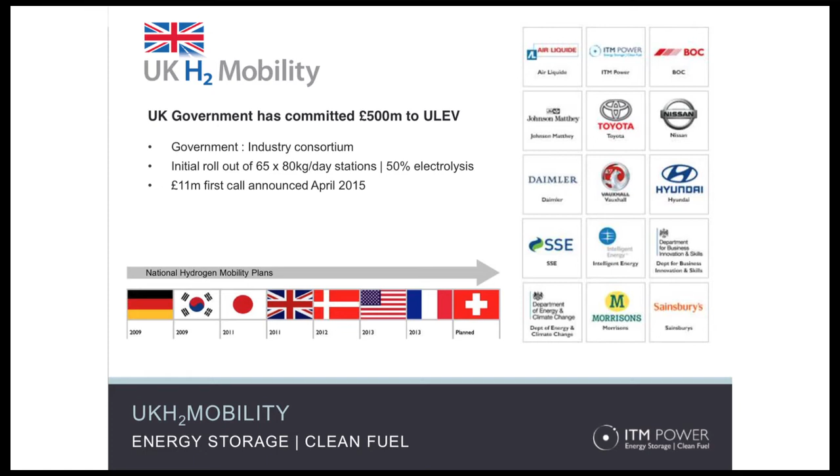The first £11 million was announced in April. So apart from a number of stations.

We looked at the station sizes - the early sizes - so you optimise the capital that you spend to fill up the vehicles. If you don't want redundant capital, we know only a few cars. So the stations are sized and the layouts agreed, in terms of what's compliant with other traditional forecourt operators.

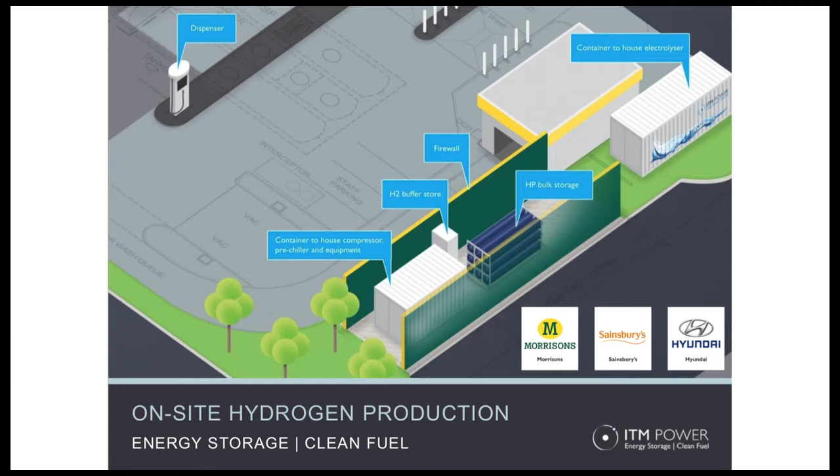In terms of where the stations will be, initially there's going to be a focus on the London area, but with focus on trunkways as we move forward.

One of the big advantages Sheffield has is that it'll be one of the first cities to have its own hydrogen refuelling station. So it'll really put Sheffield and Rotherham - I should say Rotherham as well, because the AMP is on the Advanced Manufacturing Park - South Yorkshire will have outreach to all over the country with these vehicles because of the range they'll have.

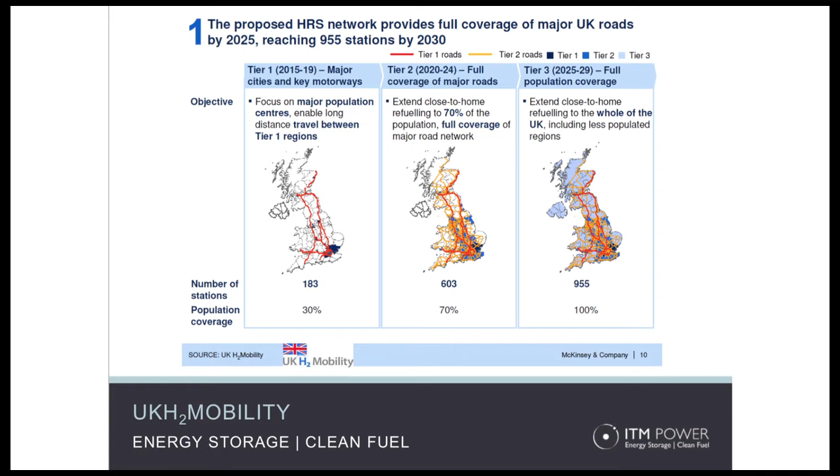This is a project where we're deploying 3 stations in London, which was a pan-European project with a number of different countries and car companies, where the car companies are putting down about 50 cars in London and will be installing 3 refuelling stations as part of this project.

In terms of Sheffield, the Advanced Manufacturing Park, it's going to be opening in May, although we're going to have a launch a bit later on in the summer. This will be South Yorkshire's chance. The reason the refuelling station was able to be located here was - initially it was going to be on the Isle of Wight.

The idea was, and the way we were able to get the funding, was because we teamed up with collaborative partners to evaluate and deploy a smart grid of energy storage, being the hydrogen. So we worked with Toshiba, IBM, SSE and Vodafone on smart comms, to really show what a system operating in a smart way could enable an island to do in terms of self-sufficiency of fuel, but utilising renewable energy.

The actual customers were few and far between on the Isle of Wight for the cars, and we thought it would be a great opportunity to actually move it up here and engage local fleets who will be able to lease the cars for trialling over the next year.

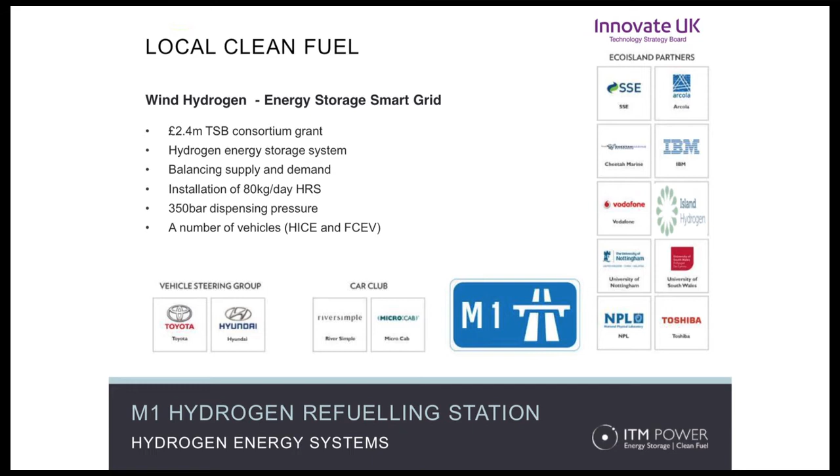In terms of local clean fuel, I put this slide in - I don't normally do it, but it does actually show the various applications of hydrogen fuel cell transport.

I dealt with captured fleets at airports, distribution, materials handling - your forklifts, your pallet trucks. We did a trial with Marks and Spencer's at Bradford, their warehouse distribution depot, in 2012. It was the actual economic benefits and the operational advantages that the system was able to deliver, as well as making fuel on site, and the environmental and air quality benefits.

University campuses, there's Nottingham, we've got a station of ours on the university campus, which was an EU-funded project. We undertook hydrogen on-site trials in 2012, engaged across 6 industrial sectors and depot-based fleets. We work with DHL, councils, utility service providers such as Amey, and a number of infrastructure companies. We took it to the Isle of Man, the Isle of Wight, London. We took it over to Germany, it's been operating from Hannover Messe fueling buses. So in addition to your traditional national infrastructure station, there are a lot of opportunities for return-to-base operational fleets that make their own fuel.

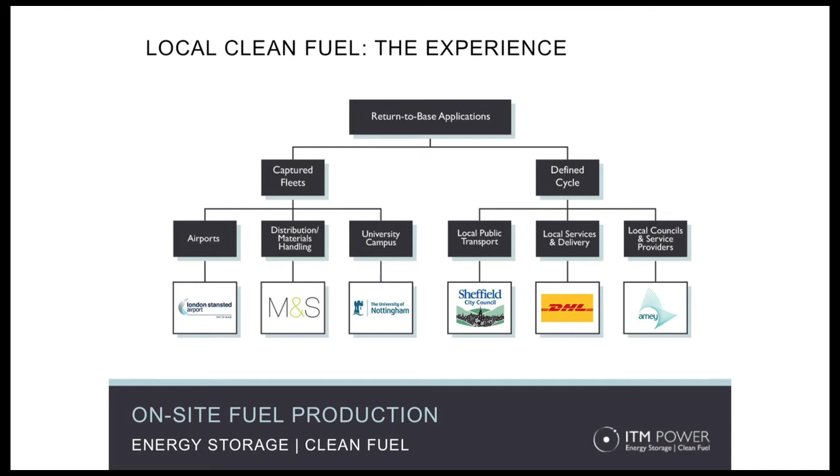So in terms of business planning, in terms of depot planning, in terms of being able to locate local fleets in urban areas and how to tick the clean emission box, which is a particular advantage in the current planning issues.

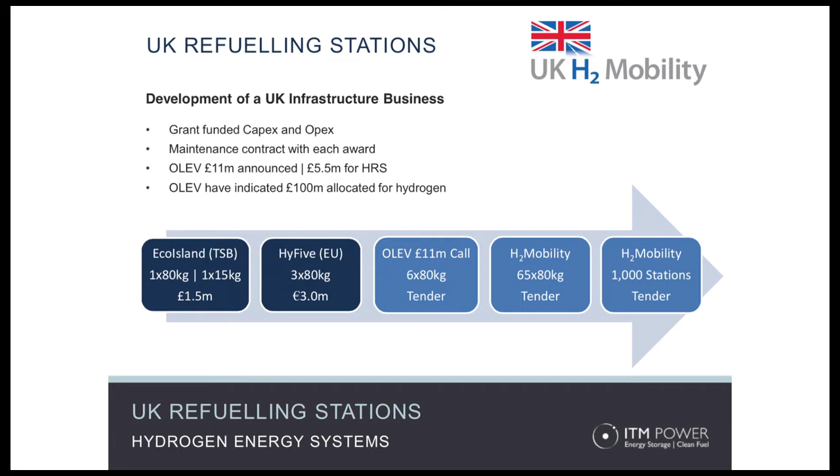In terms of other funding, I mentioned UK H2 Mobility and the HyFive. OLEV recently announced results of a call where we're deploying a further 2 refueling stations in London, so we'll have 5 operational by the end of the year in London, and the upgrade for one of them to 700 bar, which enables you to get the full range on the vehicles. And then there's the longer plan for H2 Mobility.

In terms of Europe, there's been funding available for hydrogen transport and energy from the FCH JU, and we're very active in working with other countries and industrial partners to secure that funding.

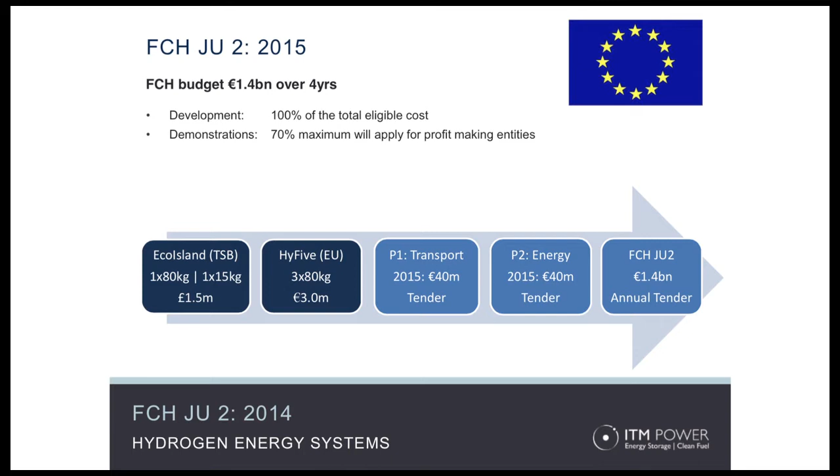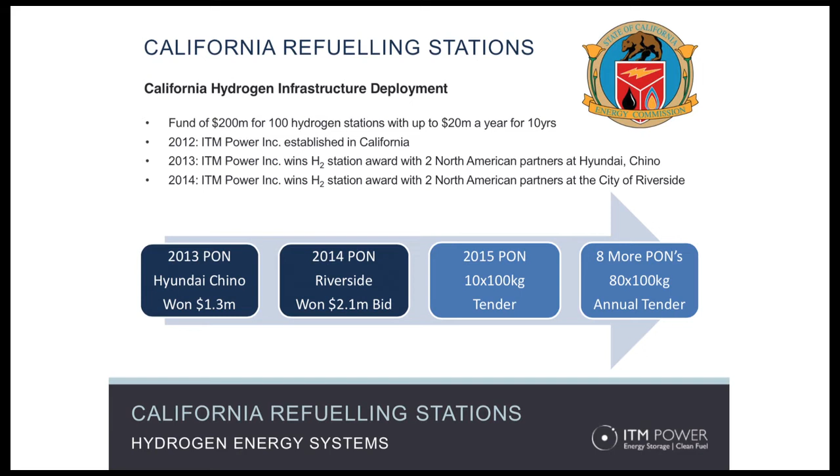In California, we have a company, ITM Power Inc., based in California, where we're deploying 2 stations this year, one at Hyundai's headquarters in Chino, and one at Riverside City in Los Angeles. California is, not surprisingly, right up there in terms of dishing out benefits and incentivizing transport. You can lease a car for $500 a month with fuel, and away you go. In terms of energy storage, they've also mandated 1.3 gigawatts of energy storage that utilities have to put aside. So there's a bit of joined up thinking going on, and there's other initiatives in Canada as well.

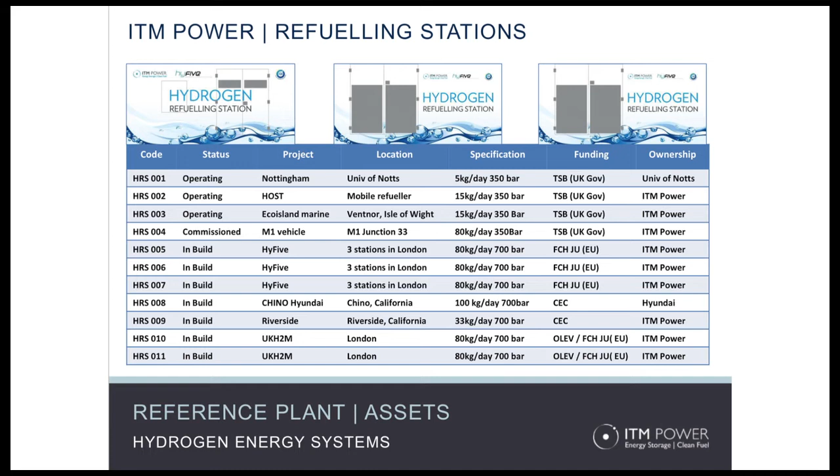So these are the stations that we're either operating, commissioned, or in build at the moment. Most of those, all but 2, are in the UK, so there's a lot going on. But whether it's power to gas or whether it's transport, it's the same technology platform. We've invested all the non-recurring engineering costs. We've got kit that's compliant across the world in terms of operation in Germany, where we have to deploy kit under the scrutiny of German engineers. It's compliant in the States, again a whole different set of standards and scrutiny because it's imported kit, and these are very, very large markets, so it's extremely exciting.

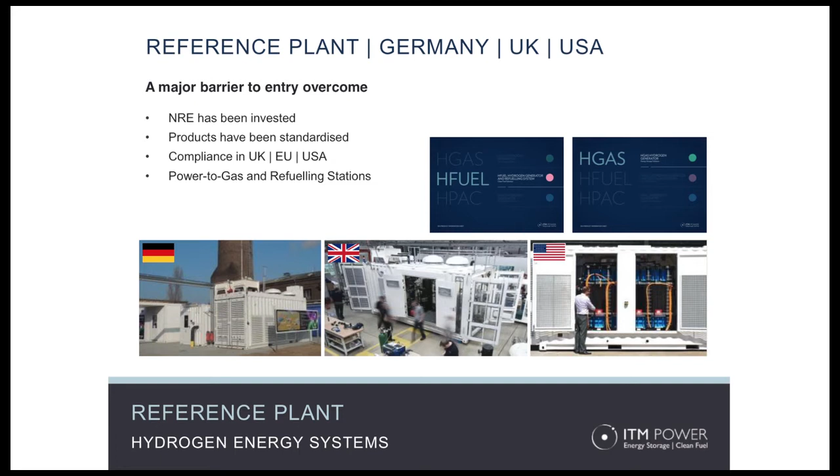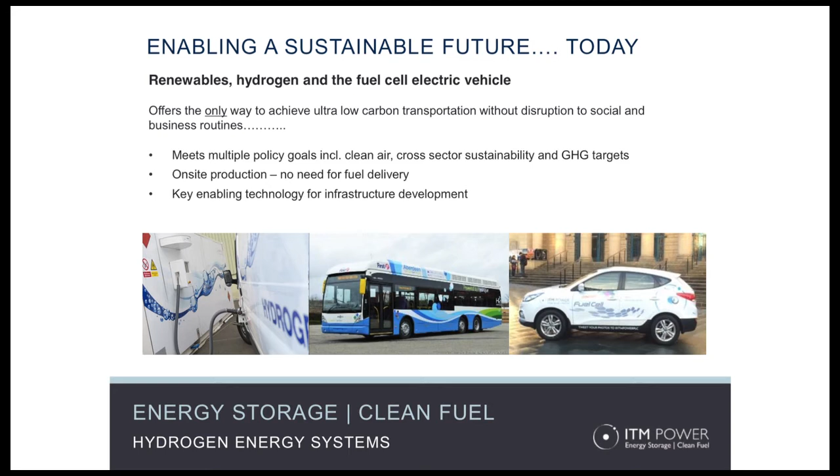But the key for me, and I always finish with this slide because it's a joined up picture, is what this technology enables you to do for clean air in cities. We've heard about the impacts and costs of pollution at a recent clean air conference in Sheffield a couple of weeks ago, and it was quite staggering the costs of diesel pollution in the cities. But it's the only real way to actually deploy clean transport without disruption to routine. And if we want people to adopt clean transport, we don't want hurdles, and this technology doesn't have hurdles.

You just need the infrastructure, and you just need the cars, and they're all coming. You can make it on site, there's no need for a fuel tanker, you make it where you need it. And in terms of economic development, there aren't many cities that actually have a hydrogen industry, so I think you can really put Sheffield and South Yorkshire on the map. Thanks very much.